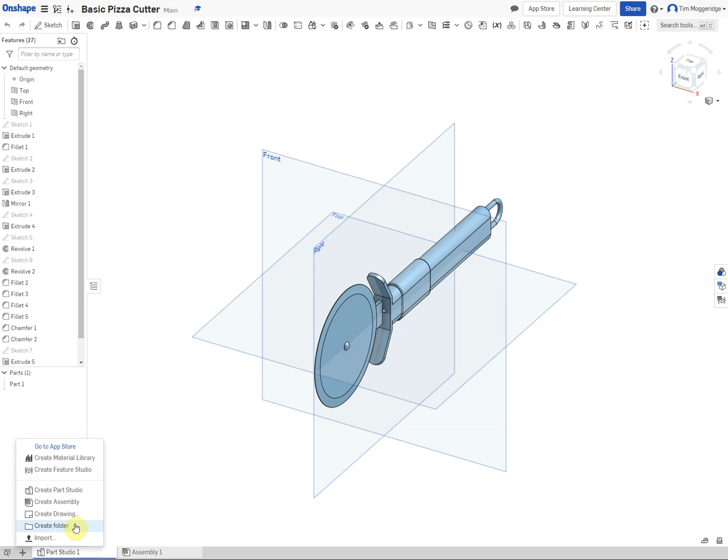This gives us a dialog box, and we're actually going to pick a custom template. So if we click on Custom Template, it then gives us choice over some different settings. Our language is English. We're going to change the size to A3 because that allows us to produce several different views at a scale of 1:1 actual size. Our units are already selected as millimeters. We will use decimal points for the decimal separator. Some countries use a comma.

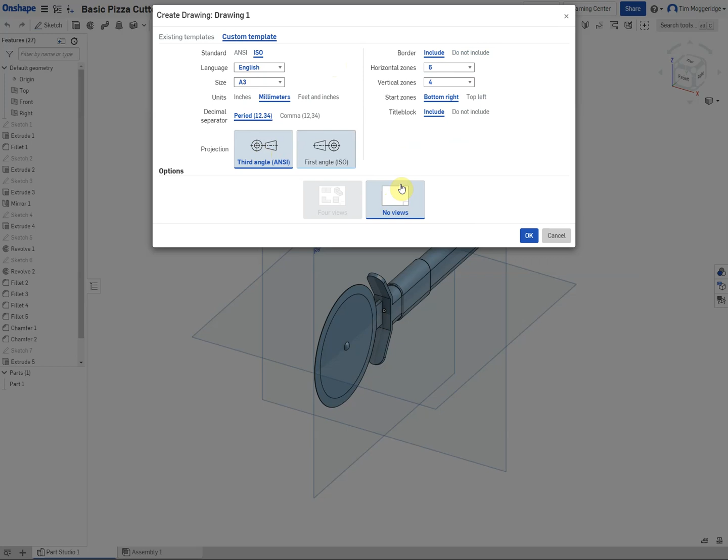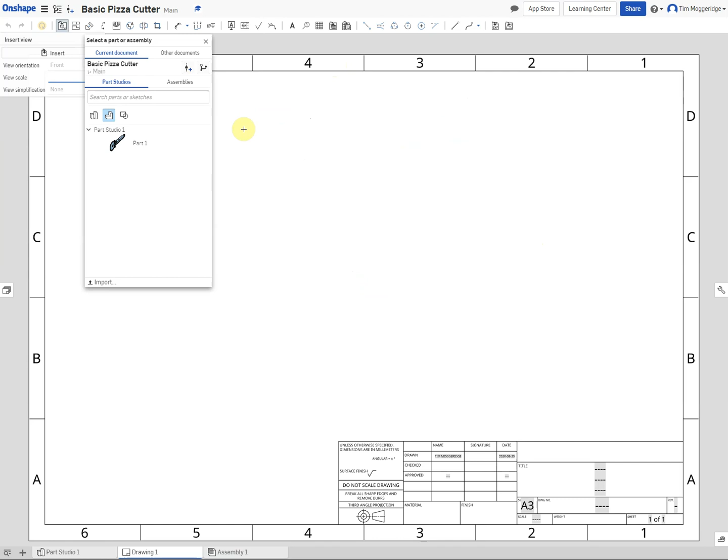But what we will do is we'll change it to third angle. That's the preferred way of showing things in drawings these days. And we'll stick with no views. Settings on the right we don't need to worry about at all. The most important ones are to change it to A3 and over to third angle. So we can click on OK, and the software will then load up a blank drawing sheet. And because we've done this from the model that we've created, we can choose that to bring into our drawing.

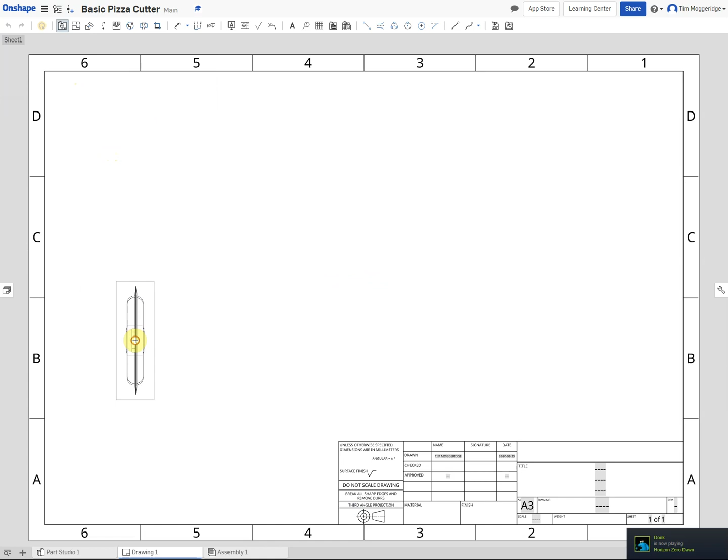So you can see here we've got a choice about the first view that we're going to bring in and the scale, and we are just going to bring that in by default. We can play around with that if we wanted to. So I'm just going to left click to position that, and now if I move over to the right, it will put a projected view, so as it is on the sheet. If we were looking from the right onto the view that's already there, this is what we would see. So just going to left click, you'll see that it automatically lines it up.

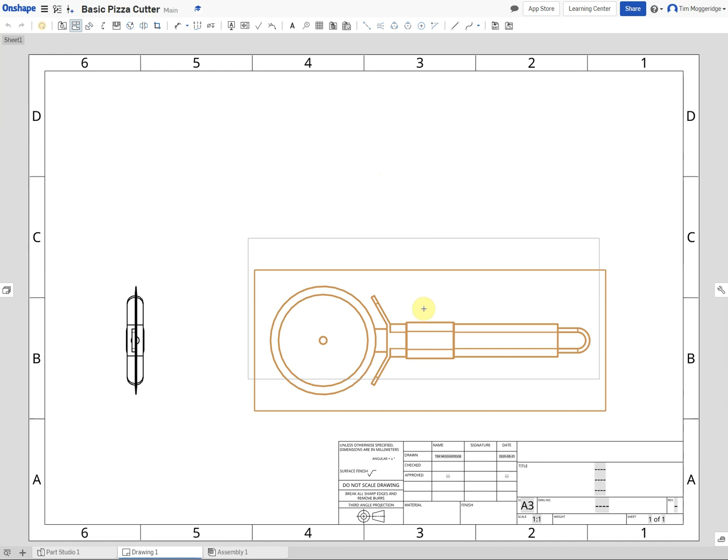And what we want to do now is to put a view up above as well. So if we left click on the view that's just been put down and move that up, it will then put a projected view of that. So that's the three views that we want. So we've got an end view, a side view, and a top view. And because this is a scale of 1:1, if we were to print this out on an A3 piece of paper, we could use this as a template. We could cut this out and use this as a template to help make some of the components.

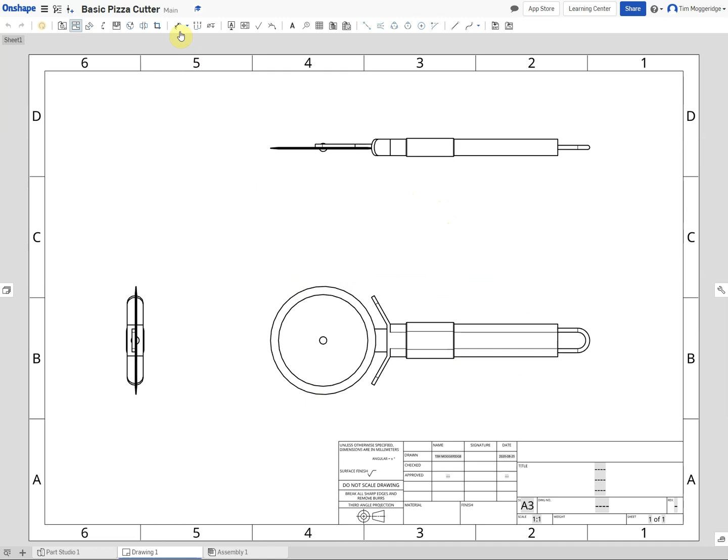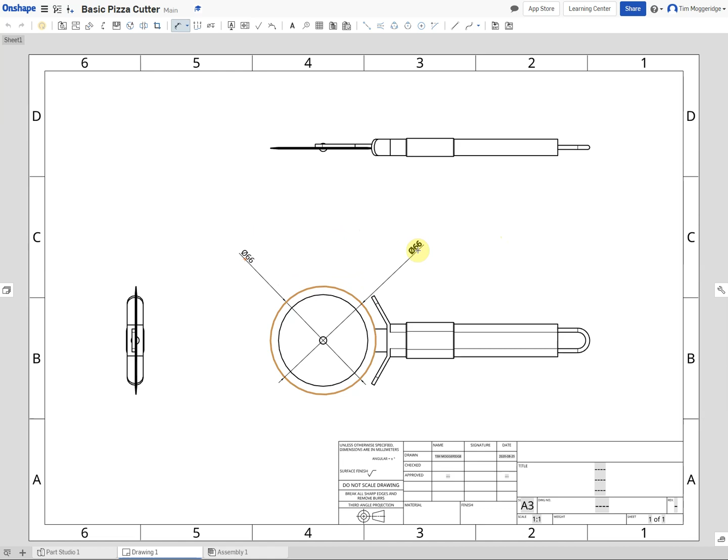It's also useful on drawings to have some dimensions, so we can add some of these in. So if we go to the dimension tool, we can click on that, and just by selecting a particular element, we can add in a dimension. So it'd be quite useful to know the diameter of the cutter. It would be quite useful to know the overall length of the product. Now, automatic dimension tools don't often pick those up straight away for us, so we can pick up the outside radius. There you go, and it picks up the center.

So we've got the center from there to the center of that radius, and if we then dimension that radius as well, we could use that to work out the overall length of the product. We can also use this to add in any widths, and we try to make sure that the dimension lines aren't overlapping. So it's useful if you're going to produce a model to incorporate as many dimensions as would be useful.

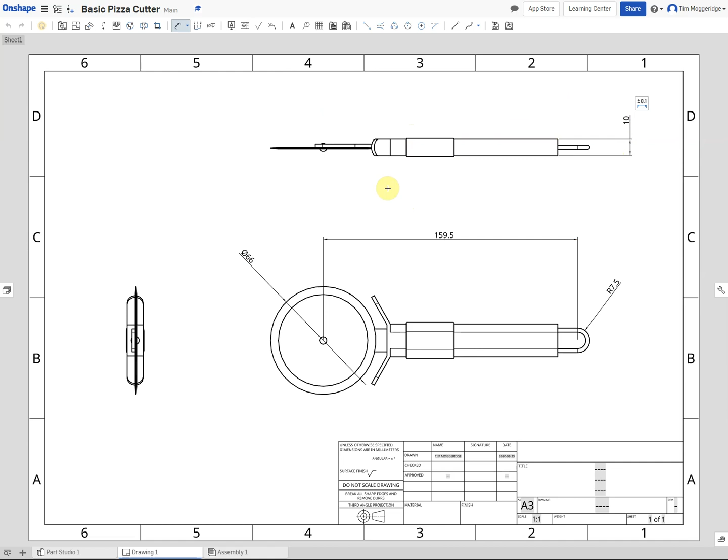Normally we would model this as a series of separate components, and we would use dimension drawings for each individual component, and then we would use a drawing like this perhaps to show how those components are assembled. But because we could be just making a simple model of this just to show a stakeholder or to test out a concept, this will suffice for these purposes.

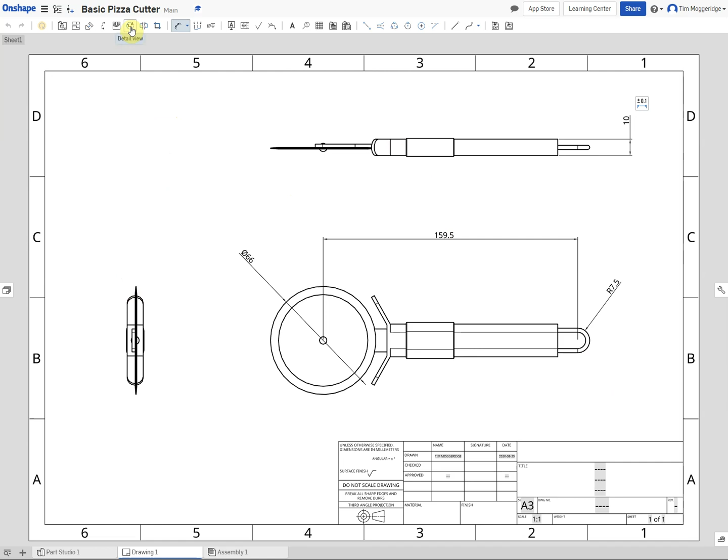Just one other thing that I will show you. The detail here is not very clear at this scale, so what we could do is we could put a detailed view in. So if we click on the detailed view, and if we just drag out a circle in that area and then click, that then puts in a detailed view that we can put somewhere else. Now, we click to place it. We can also double click on that and we can change some of the properties. At the moment that's 2 to 1. We could make that 4 to 1, which means it would be 4 times the size.

Click on the tick. And now you can see it's zoomed in on the edge of that blade, so we can see what the edge of that blade is like. And if we wanted to, we could go along and we could dimension that. So we could add some dimensions in there to show the detail of the cutting edge of the blade if we wanted to.

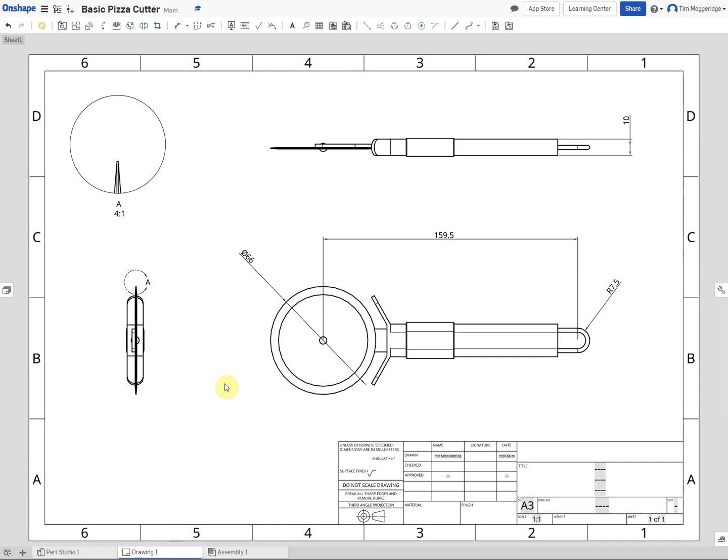Of course, this saves automatically because it's working on the cloud, so we don't need to give it a title or a name or anything like that. Drawing 1 will be saved along with the model. We could go ahead and rename it at a later stage, but that's our drawing, and that has been created in a matter of moments from our model.